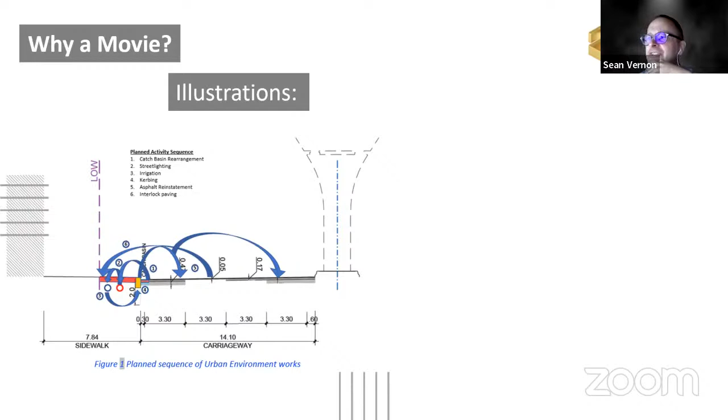So here we see the text that went into the claim. But I wasn't really satisfied with that because I thought it needed something to bolster it up. So the next step was to add some illustration to the claim. What I did then was try to almost flowchart it, but in a visual, graphical way, to show what the original process was. As you can see, we have going from 1 up to 6 to show the original process of the works, then coupled with the actual sequence of the works to show it was a much more complex, involved situation.

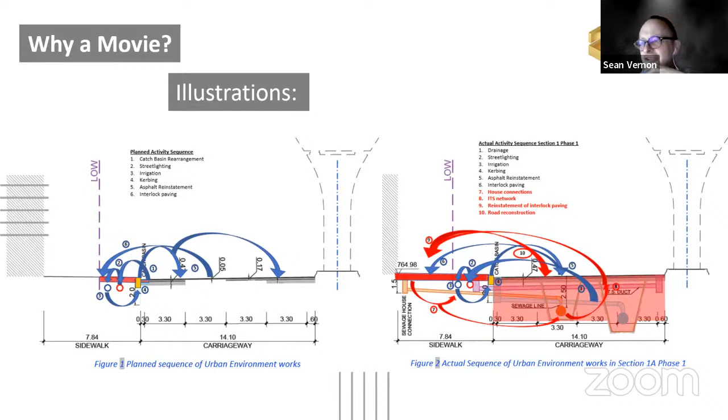But again, I found myself looking at that and saying, well, I need to trace my finger over that to see how it looks, how it's going, and why it's a problem. So the next logical thing was to use my old friend PowerPoint. So in an animation in PowerPoint, showing the original sequence, and then the as-built sequence, showing the more complexity and the way these things moved around over the section. So if you're from an engineering or construction background, you can visualize that a little better, almost in 3D, but it's still two-dimensional.

So what was the next thing to do? Well, obviously I'm here to talk about movies. So what did we do? We made a movie.

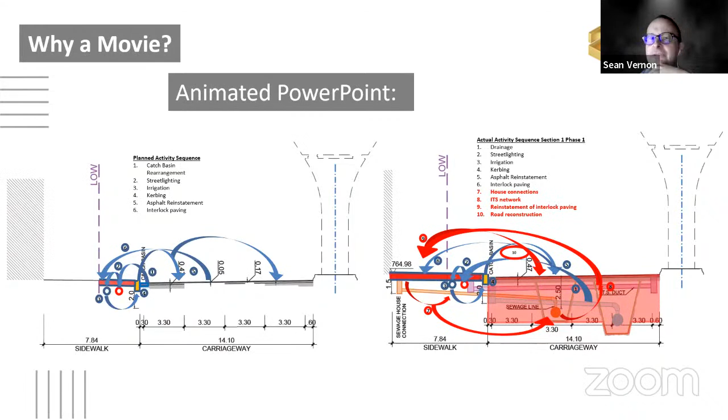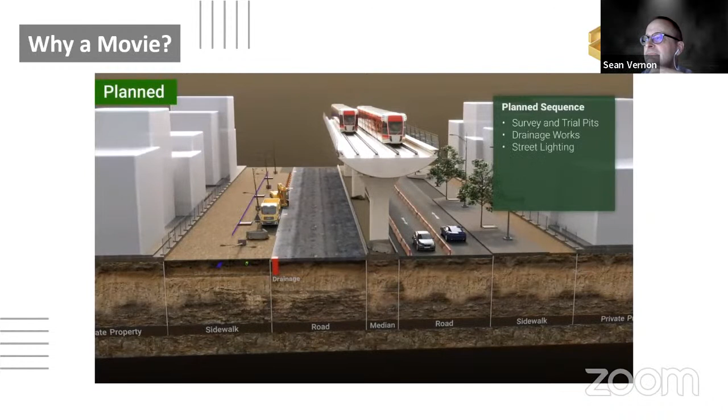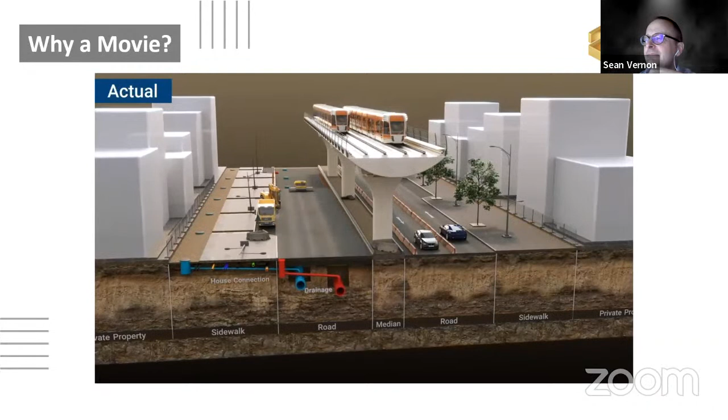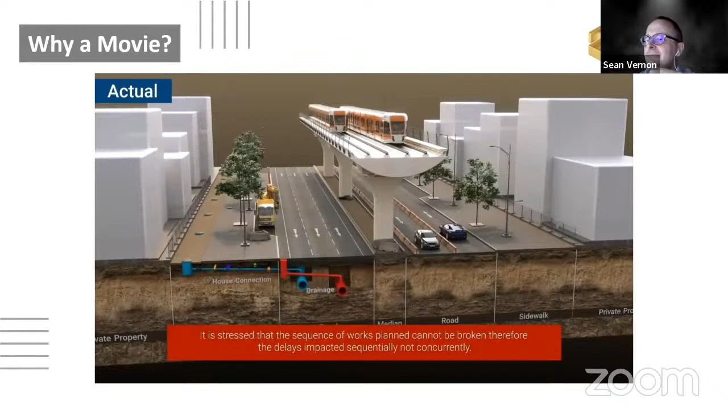First, survey and trial pits were made for each activity, which was then followed by drainage work. Once completed, street lighting were to be installed before curbing and irrigation network. Finally, paving and roadwork were to be laid to complete the works. However, these phases took much longer to execute due to the addition of new works, in particular the house connections, increased scope and obstructions to the works. It is stressed that the sequence of works planned cannot be broken, therefore the delays impacted sequentially, not concurrently.

As you can see there, that was shown to the employer. The employer had previously said, well, what is the problem? We're just adding in a few little pieces here and there, what is the problem? But when we showed the actual movie to the guy, he suddenly realized, oh yeah, okay, this is a problem, because we have these house connections going in every 12 meters. There's not this flow of work there, there are problems with getting in access, it's not as easy as it looks from the cross section. It was quite an eye opener that wouldn't really come across in the two-dimensional documentation provided previously. That's why movies are very good, because you can see there that they show the 3 dimensions.

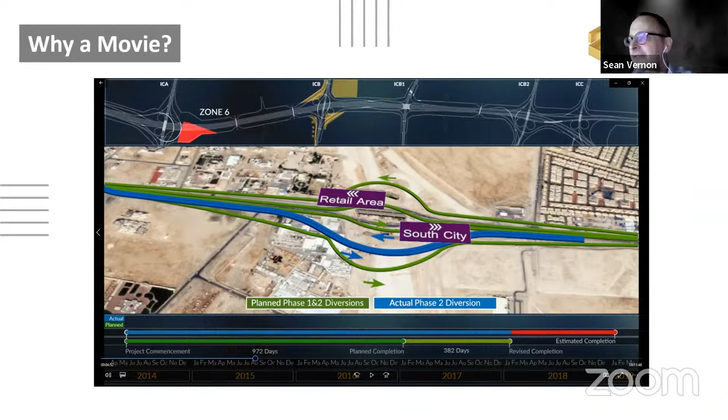They show the 4th dimension as well, the time, and they're good for things such as sequencing, timings, and locations. In this particular example, it's a still from another movie we've done. You can see that we hone in on a particular area within a site, and we also show where that area is in relation to the whole site. Then we have the timeline showing the various problems and delays experienced on that site. There's a lot of information there that, because it's visual and shown to you in that particular way, it's much easier than trying to decipher it from the stale textual document of a normal claim document. I'm also going to show you another movie now.

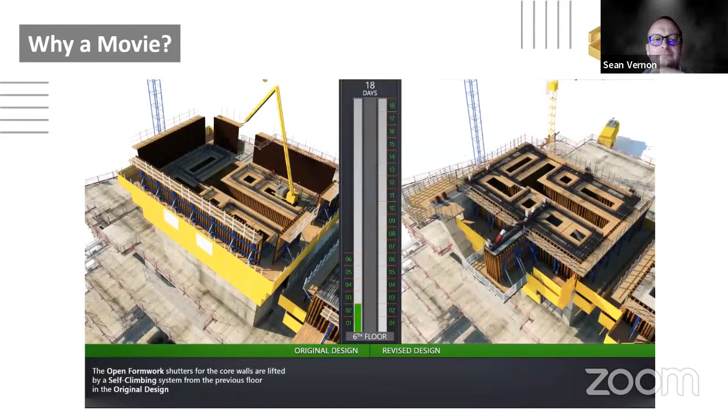In the original design, the open formwork shutters for the core walls are lifted by a self-climbing system from the previous floor, which had a 2-day planned duration. The rebar works commences on the 2nd day, which were to be prefabricated on site and then lifted into place, installed and inspected by the engineer over a duration of 3 days. The formwork is closed and inspected between the 5th and 6th day, and the concrete was to be poured on the 6th day.

In the revised design, concrete pouring can only take place 12 days beyond the original duration due to the new constructability complications and additional work that has surfaced as a consequence of the design changes. Now we will illustrate how and where the additional 12 days are being consumed due to the revised design.

Because of the new tapered walls being built simultaneously with the core walls, the formwork for the tapered walls is required to be lifted by a tower crane before lifting the self-climbing system. Due to the constructability challenges faced with constructing the tapered and core walls simultaneously, opening and lifting the climbing system requires an additional 1 day.

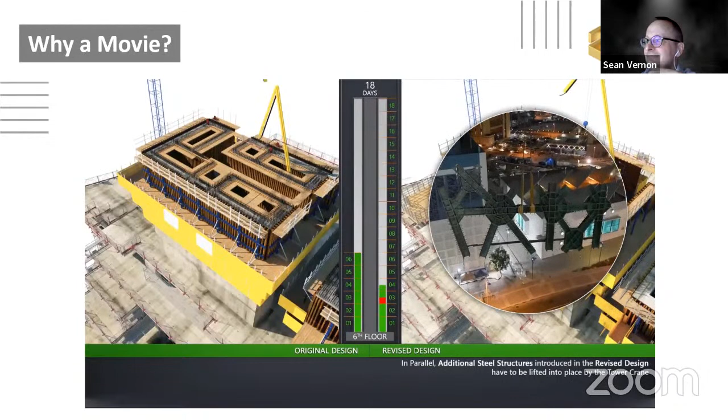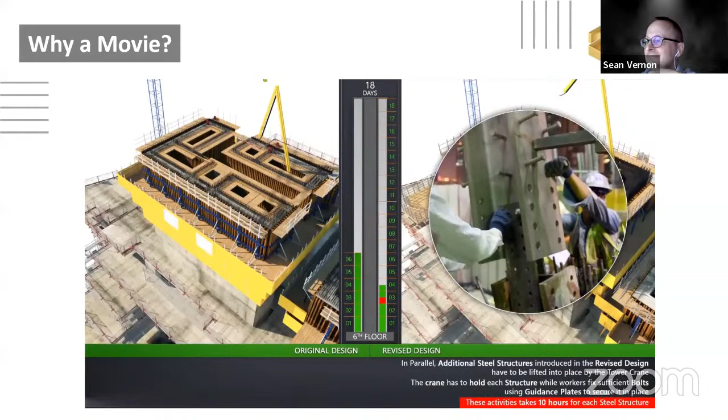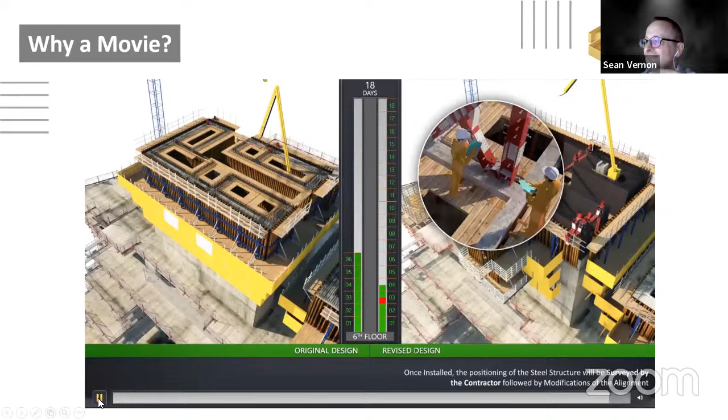The rebar not affected by the additional structural steel commences and is installed in locations free of clashes. In parallel, additional steel structures introduced in the revised design have to be lifted into place by the tower crane. The crane has to hold each structure while workers fix sufficient bolts using guidance plates to secure it in place, which takes 10 hours for each steel structure. Once installed, the positioning of the steel structure will be surveyed by the contractor, followed by modifications of the alignment, which takes 30 hours.

So what you can see there is a lot of the things I was talking about previously. You can see sequences, and you can see the changes in sequences because you have the comparison left to right from the original to the revised design. You can also see in the middle there a gauge of how long it takes, so in number of days it will take for each sequence.

And then finally, you have the addition of videos, which are actual videos from the site that show the actual conditions that were working, how things were done, and still shots for that. So it's a whole visual extravaganza, basically, to explain the problems as to why something is completely different from how it was originally, and the problems that the contractor was suffering.

So you can imagine that in just a very short piece of time there, you have a lot of information that has been portrayed and shown to the employer, as opposed to having to wade through documentation and maybe even sketch things out yourself to understand how things were coming about. Okay, so that's why a movie is a good idea.

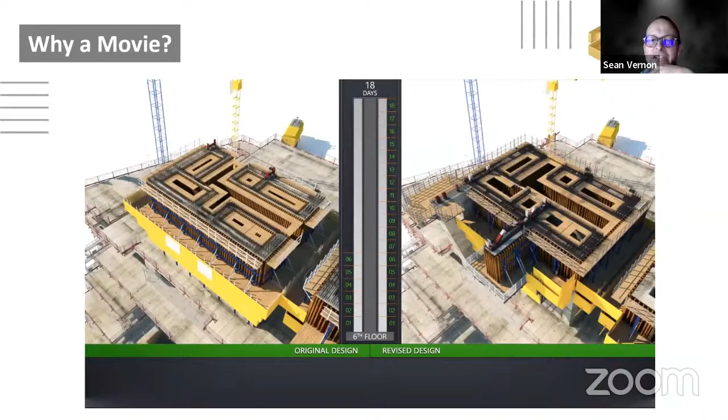So in that case, what is needed then to make a movie? Well, the first thing we need to know is what your claim is, basically. So we'll need a brief précis of the claim. What is it about? Is it about disruption? Is it about delays? Is it about change in sequencing? Is it about changes in the works, the scope of works, or things such as that?

Because 3D might be the way to go, then we'll be needing things like BIM models. I mean, most projects these days have got BIM models, and they're done on BIM, so they should be readily available. We'll need things such as we showed in that one there, the progress photos and progress videos. Very often people make that.

Aerial photographs are very common these days, and satellite photographs too, to show the progress of works over time. Of course, documentation too, if we need certain documents during the movie, such as letters, emails, and the like that are pertinent to the claim. And my personal favorite is charts and tables, because we can make them look very good on film.

So that's kind of why you need a movie and what you need to fuel a movie. But what is the actual process of making the movie? Well, it's not dissimilar to the process in Hollywood, to be honest with you, although it's slightly less glamorous. There's not the same premieres and such like, and there's not as much champagne floating around.

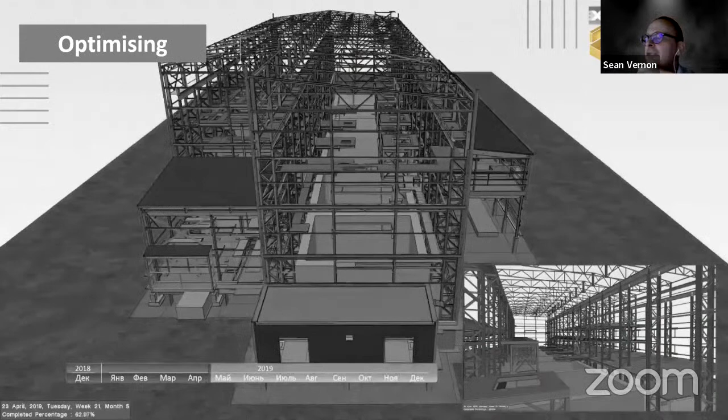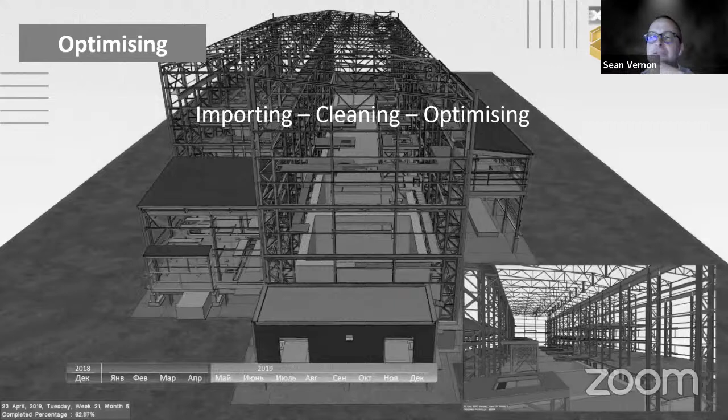So the next thing we do is the optimization of the BIM models - hopefully there's a little extract of a BIM model there. So what do we do with those? It's the importation, cleaning, and optimizing. And again you need to have that script there, because the BIM models are very heavy, with massive numbers of layers, notes, 3D data, and such. It takes a huge length of time to clean and optimize, so if the script can hone down to what particular models are needed and the minimum that needs to be shown, that can save a huge amount of time and effort to get the movie going a lot quicker.

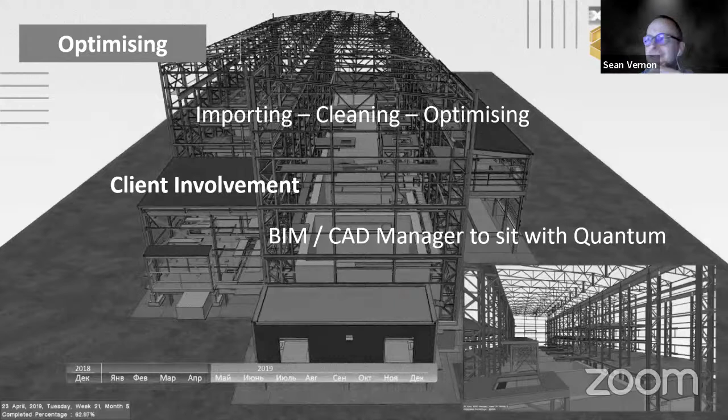What is the client involvement needed there? Well, obviously we don't know our way around the models, so a BIM and a CAD manager need to sit down with us and guide us around what is good and what is good to show on the movies. But I will also say, if there is no BIM model, don't despair, because the movie I showed you for the Metro was actually done, unbelievably, from a cross-section in PDF. So we can do marvelous things.

So what next then? Well, I talked about reference material. What sort of things do you need? Well, obviously we need to think visually - that's what I've been talking about. This is my mantra: it's all about think visual, show, demonstrate, use the graphics. That's my personal mantra. So the sort of reference materials we're looking at are things like programs - if it's about extension of time, then extracts of the program showing delay events, these sort of things.

Photographs, videos that will actually demonstrate, bring a bit of context, bring a bit of reality to the presentation. Logos of the various parties, and tables and charts, because if you're dealing with numbers and figures, maybe productivity over time and such like, we need to have the histograms, the S-curves and such like, and we can do marvelous things animating those as well, which bring them out of the 2D of the page and give some sort of context and life to these things that they deserve.

Now, what would be the client involvement in that? Well, basically a lot, because we usually bring like a Santa's wish list to the client of the things that we want to show and the things that we want to use to get them on screen.

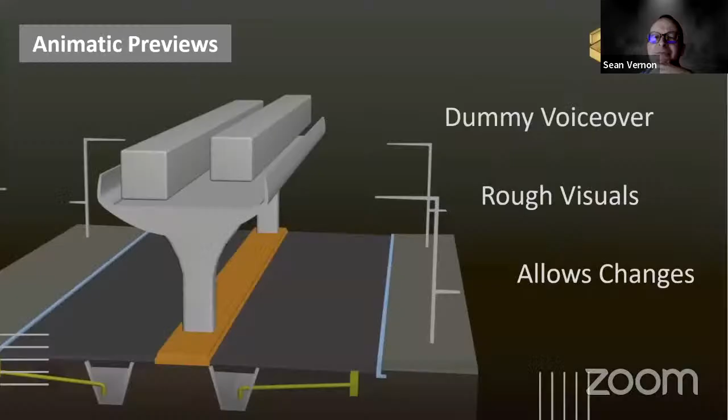So the animatic preview will have a dummy voiceover. The visuals will not be as refined as you can see there. But the good thing about that is it means that it can allow changes to be made quite easily and quite quickly.

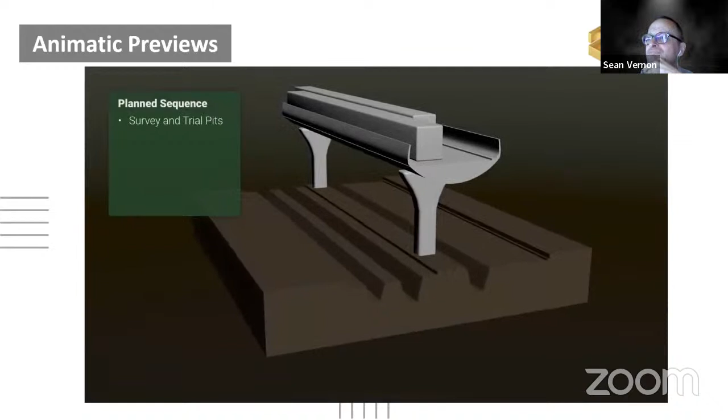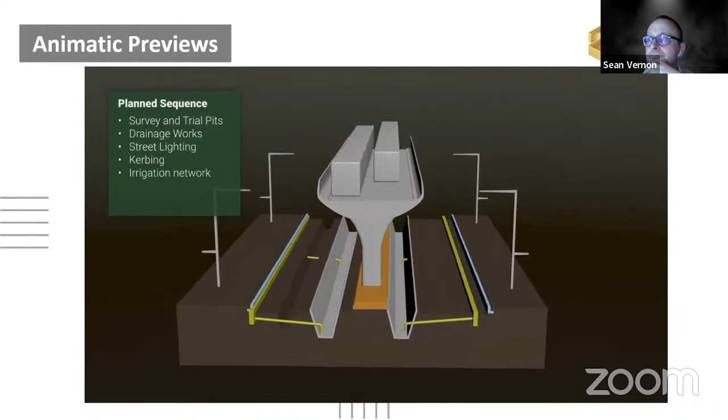Let me show you an example of an animatic preview from the same job where we saw the movie. First, survey and trial pits were made for each activity, which was then followed by drainage work. Once completed, street lighting were to be installed before kerbing and irrigation network. Finally, paving and road work were to be laid to complete the works.

So as you can see there, it was quite a difference indeed. But the good thing about it is that, as I say, it's a first animatic preview. It shows you the kind of concept that we have, and it allows changes to be made.

For instance, the engineers amongst us will all see that in the animatic preview, the stormwater drainage was incorrect because, bless them, as I said, it was done from a PDF model, a PDF cross-section, and the drainage was showing the actual backfill to the drains, and that looked like it would be an open culvert from the cross section, but in fact it's not. So that was an error that was made there with regard to the interpretation of what that cross section said.

But it's easy to remedy. It's not a problem at the animatic preview stage. And so that is what it's for. It's a rough out, and it gets the rough timing, the rough visuals to inform then what it will become, which is, as we can see on the right-hand side.

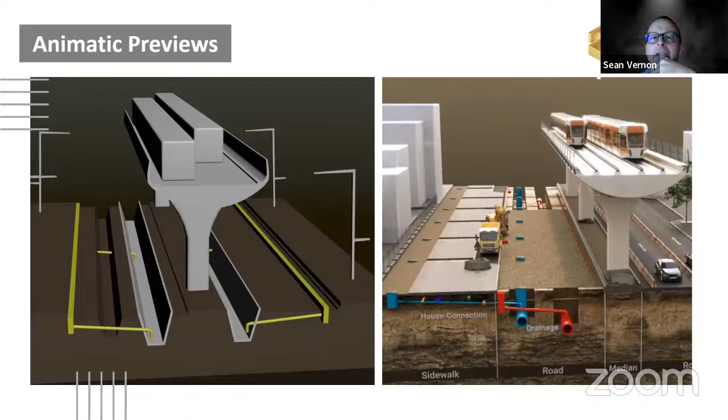So what does the client need to do with that? Well, again, we need workshops to work with the client, to see that everything is logical, to see that the sequences are correct, to see that the flow of the work is correct, that we're actually showing what is true. Because at the end of the day, we're not there to make fantasy. We'll leave that to Walt Disney.

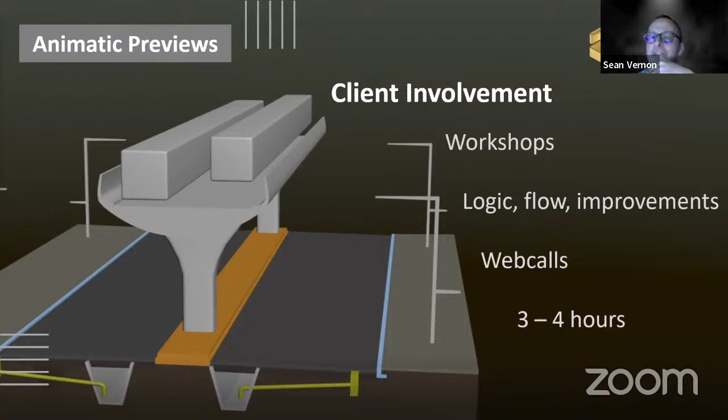We're there to show facts, and we're to portray the facts in a visual way, and we have to be accurate with those facts. We're not going to fabricate anything. And again, we'll be doing that either in web calls or in face-to-face, and they can take 3 to 4 hours sometimes if it's a long and in-depth movie. But then once that's signed off, we can then start to get onto the animation proper, and that will be the next phase there. And here we go.

So the 3D animations and the 2D graphics will be refined here, and we'll start to put in textures and such like. So as you can see there, we have the 3D cameras, the angles there. We put in the 3D objects. So in that particular case, the overhead metro line there.

We put in things such as equipment to give a sense of scale. So we have the cars there, we have the plant on the left-hand side, the excavators, the tippers and such like. We can put in things such as 3D characters, such as workers, not necessarily moving, because that would take a huge amount of time and power to do that. But it gives a sense of scale as to what things are, especially if we're doing an internal video. So something like maybe a hospital or an office block or something, gives a sense of scale to it.

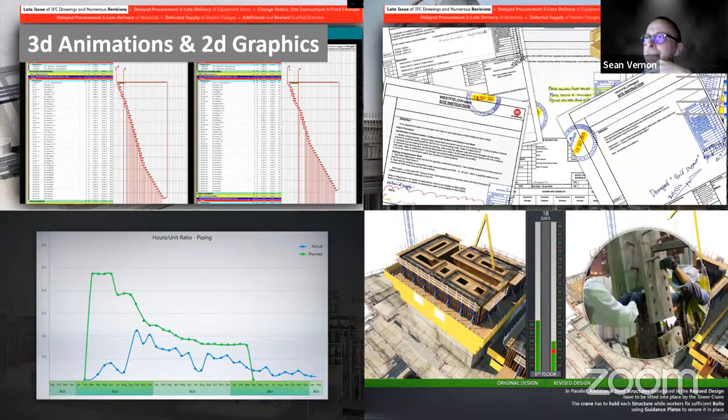And what we'll also do is put in the 2D graphics at the same sort of time. So like the photos, the charts, the documentation and such like that is needed there, as we said before. And even the photos and the videos that we can put in there to show the realism of the facts of what was happening on site.

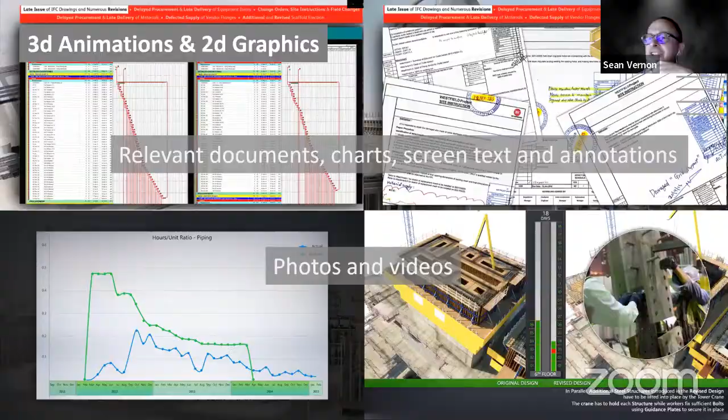So once that's done, we can then come to the rendering. And this is basically, it's not that exciting. It's basically the computers going on overnight, and after the preview is signed off and the 3D animation, 2D graphics are all signed off, then we can start to do the rendering to make it look realistic, to make it look clear, and get the colors all working and such like, as that particular still shot there shows.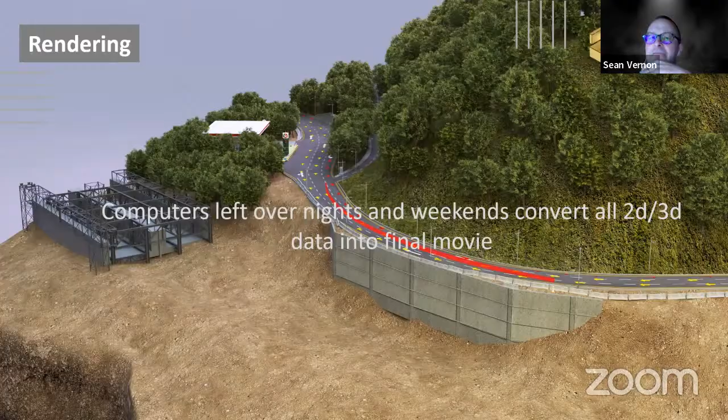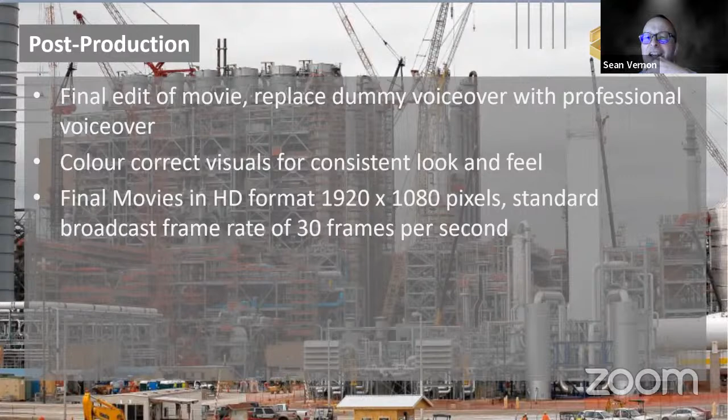And then following that, what happens then? Well, then we get the post-production. So at the post-production, we'll have the final edit of the movie. That's when we get the professional silky tones of the professional voiceover. We'll get the colors looking consistent and the look and feel looking good. And then the final movie, for the techie people amongst us, will be in HD format and delivered as MP4, which will play on any Windows or Apple device, and can be scrolled back and forwards, paused, sped up, stopped, everything you wish to do. And we can also embed them in any PowerPoint and such like. Very, very easy to use.

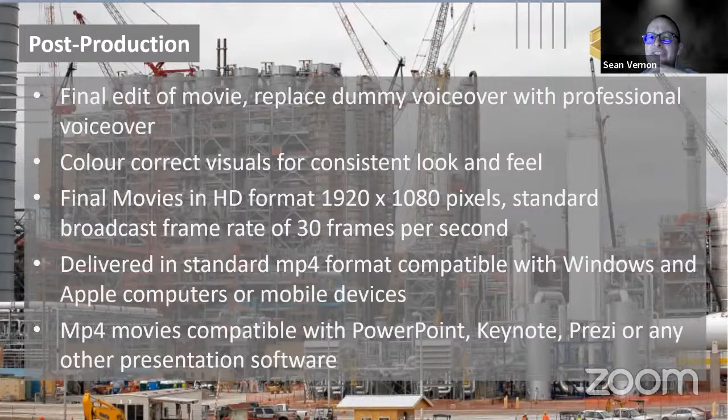Well, a basic voiceover script and direction is going to take roughly about 2 weeks, depending on the complexity of the script and whether agreement can be reached fairly early on as to the final running of the script. The rest of the process will generally take about 5 weeks. So we're talking roughly about 7 weeks for a movie, from the initial kickoff meeting to getting the movie in hand.

Now, as you're well aware, I'm in Qatar, so a lot of things we do here need to be translated into another language, and in particular into Arabic. I'm fairly sure that all you guys in South America will not need Arabic translations, but however, this is kind of interesting because it shows cultural differences and language differences.

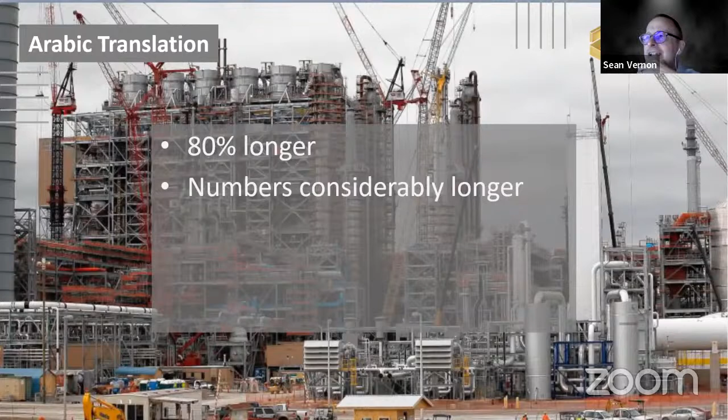An Arabic translation will roughly be around about 80% longer than the English. And conversely, if an American voiceover is used, it'll be roughly 20% quicker than a British English voiceover. One of the reasons for that is that numbers when pronounced in Arabic are considerably longer than those in English, which is another reason why we try to keep numbers down to a bare minimum and to the least number of digits that we can.

We also need to do things such as screen text translation, and because of the way that the language works, being read from right to left, any comparison that has been made would be made from right to left as well. And of course, the movie needs to be timed to the voiceover to avoid that 1970s, 80s kung fu movie dubbing type of embarrassment.

So, okay, that's basically what I have to say about making movies.